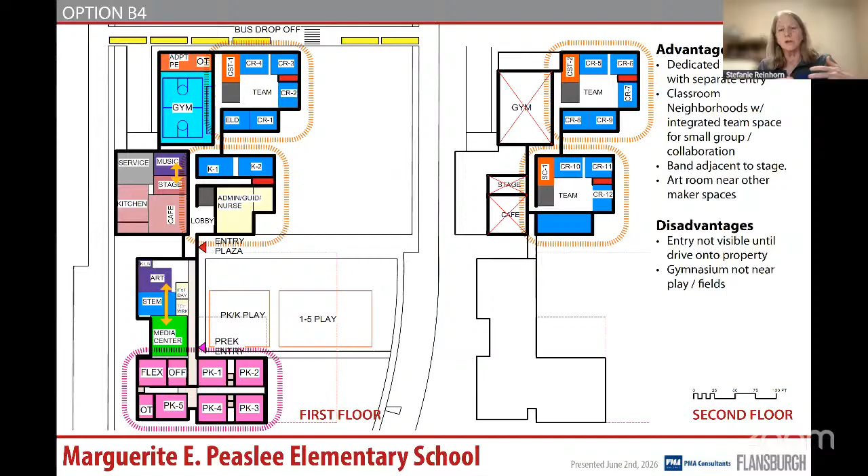With that said, I think these are things we would potentially be able to achieve with other configurations. I don't think it's exclusively possible with this configuration. It can be, for example, things like movable walls between classrooms creating different opportunities for grouping across classrooms, or having small spaces adjacent to certain classrooms without that team space. But that's kind of where it came from. I don't know, Greg, if you want to add anything to that.

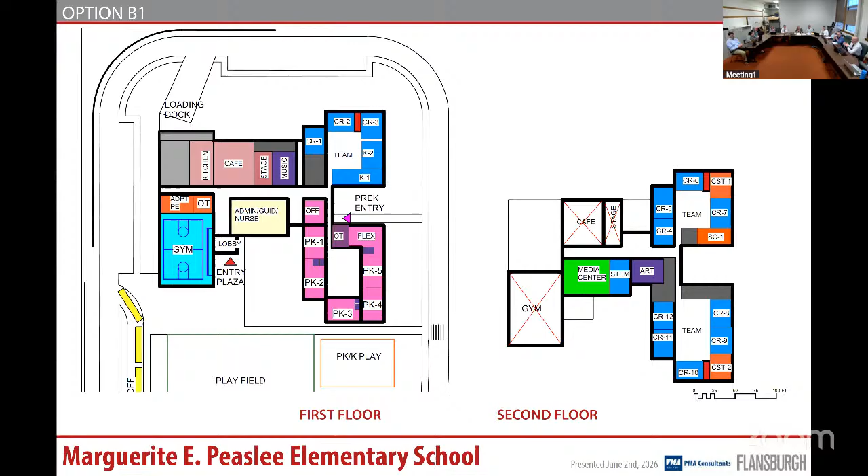Yes, so the only thing I would add, Stephanie, is that when you look at this C series, grades 3, 4, and 5, the idea was to have a pod of third grade classrooms together with neighborhood space where they could come out and conduct their learning outside of the classroom, gather outside of the classroom. So in the C series, the learning neighborhood was really important.

As we look at a smaller neighborhood school, obviously you have multi-age classrooms near each other. I think it would be nice to have, in terms of academic space, flexible space that classrooms could spill out into, but it's less important in a neighborhood school model where you have 2 or 3 sections of a grade level. Thank you. Any other questions regarding this design update?

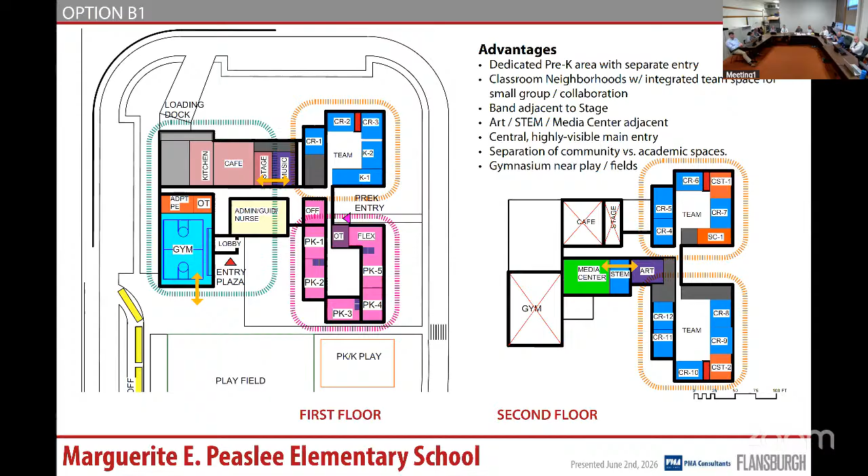Could you go to B2? I just had a question on, so one of the things we talked about before was what happens to that space between the addition and the existing building, and it looks like you've created some space between the two. Is that a hallway? Is that a courtyard?

That was my concern, because you'd have a big interior block. And I think that addresses that concern. You preserve those views and create views for the classrooms on the opposite side. And frankly, it's easier to construct because you have a buffer space.

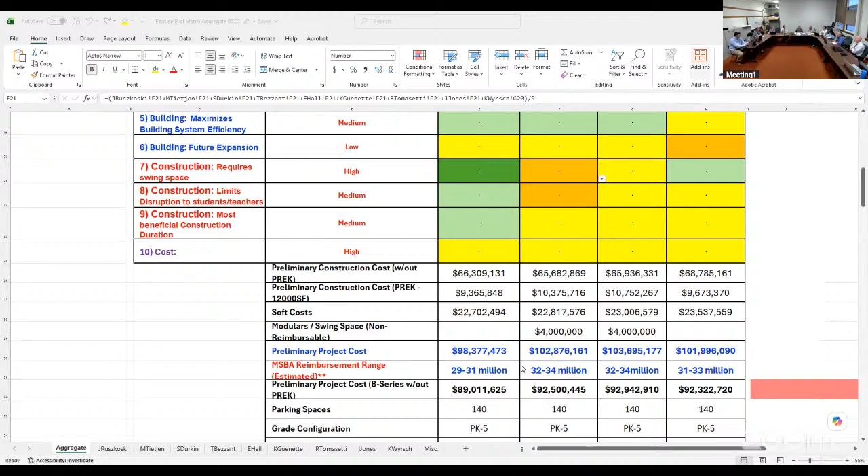And then I think when you step back and look at what the different options can achieve, there's value to what a B1 can do versus a B2 compared to a B3 and 4. When you look at B4 with the addition in the back, it does stress your athletic field and play fields. I think everybody can look at B3 and say this addition out back is stressing how we displace play areas and play fields. So that's pretty apparent. I think B4 does that maybe even a little bit more, to be honest with you.

So I think it's good if you could, are you able to log back into the site plans? Yeah. But I would say looking at the overall option, B4 gives you a little bit more flexibility in designing those academic neighborhoods, et cetera, because you have a bigger addition. But it does stress what you can do with your play fields and play areas.

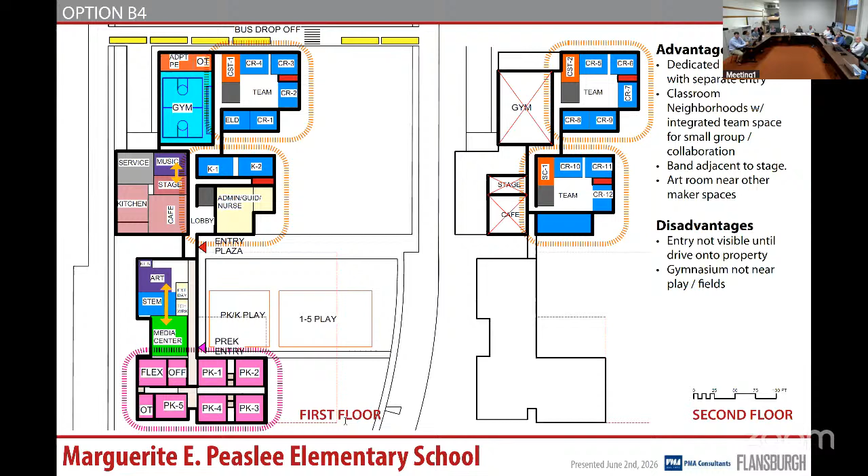Honestly, to me the B4 looked more chopped up than some of the other options. I have a hard time envisioning how that approach into the building is gonna look with just a teeny tiny chunk of the old building and then new building behind it. It's a lot of square footage.

I think the beauty about B4 was you're over your existing square footage, the 45,000, so you can swing all the kids into it. Logistically, it's actually a really smart option if you don't want modulars, but it does push your play areas to the south.

And I would say of any of those options, it's at least equal with B1, if not more, on site impact, because there's a lot—you're maintaining the existing building, plus you're putting a big addition and you're putting parking in the back. It's a lot from that standpoint.

As Jennifer pointed out, it's gonna be difficult, say with the gymnasium—you want gymnasiums to have community access. Sure, you've got a big parking lot there, but day-to-day it's hard for students to go back and forth to the play areas.

So I would say B4, looking at this, we can reconfigure the wings—the wings can rotate, the wings can do whatever—but at the end of the day, the play areas are still going to be justified to the south. B4 is a great option for being resourceful by retaining some of your existing options, but it's probably restrictive.

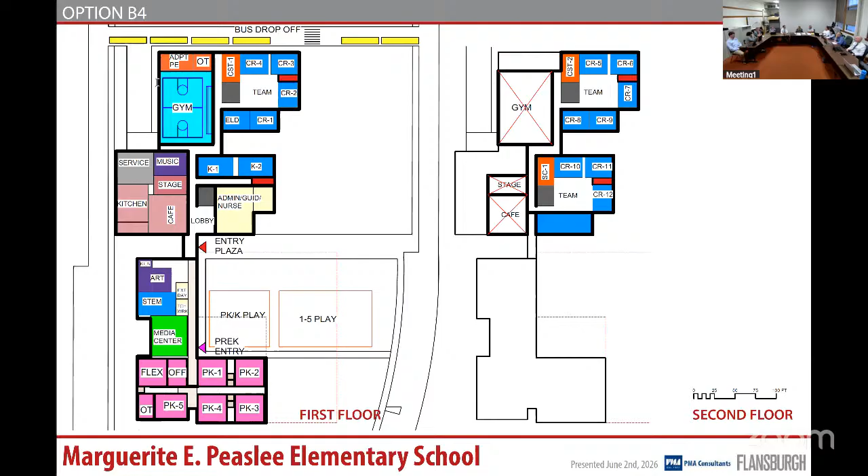And then I think on B3... Can you compare B3 and B2? Yeah, that's fine. I think the site plan's kind of the best there.

So losing the baseball is gonna be a hit to the programs. We still have a baseball and a soccer area to the right though. Could we enhance those? In effect, you could, but right now we're staying in kind, because those estimates don't look at improving anything on that. But if you go to B2...

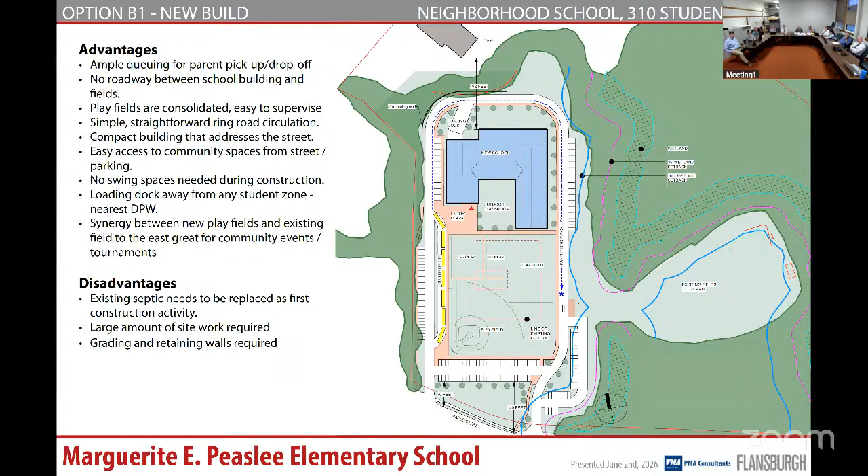Can you address where would modulars be located on this site, like B2, B3, where would you put them? So on B2, we would locate the modulars on the north side, in the playing fields. You're going to have the geothermal installed, then a section of modulars, kind of as an early site enabling item. We get the loop road at least established, but you're going to have the geothermal system being installed, and you're going to have modulars to the north, because that's the only area where you can get the 10 classrooms plus.

How many modulars are there? We're looking at 10 right now, but that's something we need to evaluate, because right now you have approximately 12 general classrooms within the main building with the K.

We're just looking at a general approach to the toilets and a little bit of supervision with admin.

And B3? In B3, it can be a little different. We can put the modulars to the north, justified to the right side of the addition, or to the south, but we'd probably propose keeping it in that area so your day-to-day logistics isn't interrupted. If we put the modulars in front of the building, that would disrupt your current parent pickup and drop off. So even on B3, we'd probably put the modulars perpendicular, justified to the right-hand side of the addition, which would preserve your current pickup and drop off. There's a lot of logistics when you get into swing space, and it's temporary, but it's something to be considered.

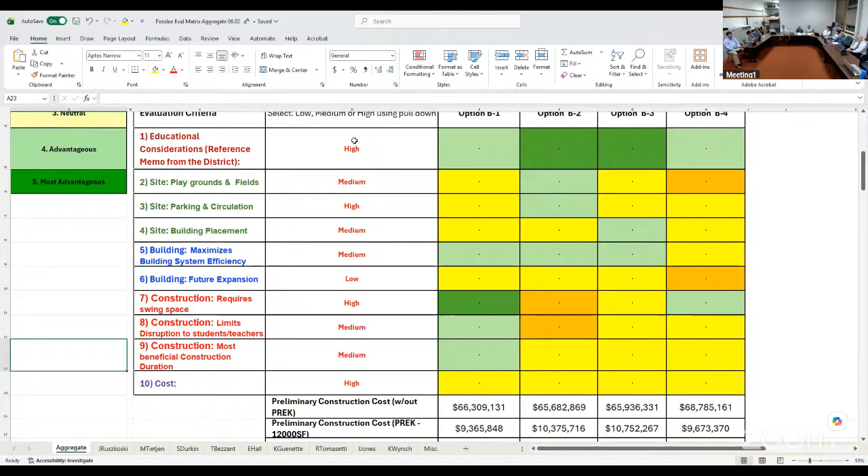But does anyone feel strongly about preserving B4? And if I did a show of hands, does everyone feel like we could eliminate B4? Speak up if you want to keep it.

Okay, so if we eliminate B4, it leaves us with a new build and two add-reno options. And those ranked identically on our heat map. They both had their advantages and disadvantages, as you can see.

For building placement, people thought B3 was more advantageous than B2, but then for parking and circulation, it's the opposite. They both ranked the highest on the educational scale, which everyone had as a high priority. So scoring-wise, they tie if you're looking at it as just a pure score, but both of them had their advantages and disadvantages, as you can see on the heat map.

I think it would be interesting to hear from, if anybody's willing to speak up, who is undecided, what data they would need to receive to become decided. If anyone's willing to speak to that, who's still kind of making up their mind between the new build and the add-reno.

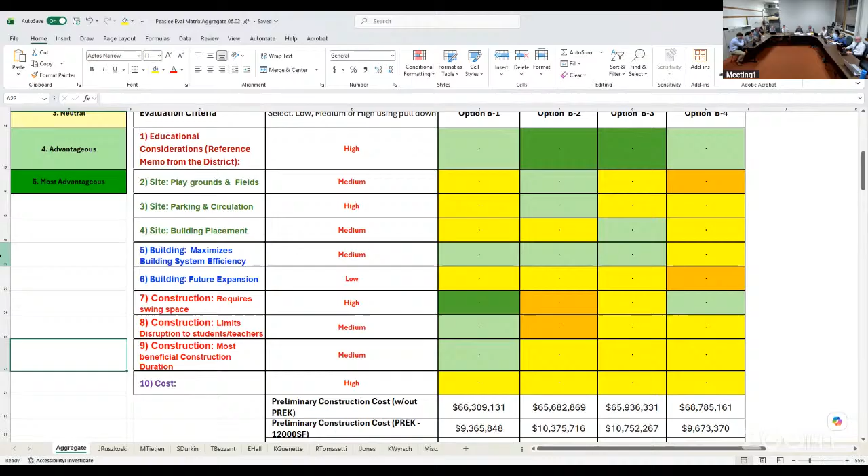That's a floor plan schematic difference between B3 options. So you can modify whether the addition is in the front or the back, that's the biggest thing for voting. I agree, I really do like having the DPW entrance and exit, so all of them may have to use that access.

You can still use DPW as a staging area, with a gravel access road. But the issue is, as we brought up earlier, on B2 the addition is right in front of the existing school.

So you're going to have access off Maple Street. Maybe there's a way we come down out of DPW and loop around, but really that whole area where you see the addition and the parking — from a contractor's perspective, if I was bidding it, I would want all that access.

I'd just answer your point directly, Jake. To me, life has a certain amount of inconvenience, and I can live with disruption if the end game is a much better product for the community. We all have inconvenience, I don't take it personally. Traffic sucks no matter where we are.

So I wonder with this option if traffic would actually improve, because if you think about the current site of Peaslee and the land space in the front, where cars queue up along that horseshoe, I'd want to know how many cars queue up on the current horseshoe compared to what was proposed.

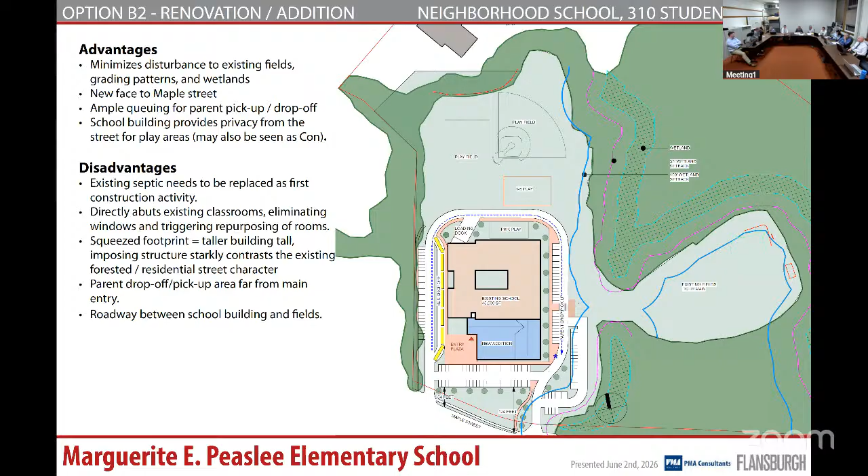I think for our purpose, we're really looking at B2 and B3, an addition to the front, an addition to the back. They're identical square footage, and I tried to make the floor plan identical just to make it easy - just for B2 and...

Rick, could you tell me, are the start times for pre-K and K through 5 the same, or could they be staggered? That would help alleviate the...

No, for me, it was, in addition to the large gym in the front of the building too, which is something that's not - how are we gonna make that look attractive? Because the gym generally does not have any windows. Except, yeah, it's gonna be a taller massing. How is that gonna play with getting the proper amount of daylight in that 25-foot court? Is that south facing, right? That's south facing, so basically that's gonna be blocked because you're not gonna get a ton of daylight in that 25-foot gap between the existing building and the new addition, right?

It's gonna be a shadow from the... I think on B3 programmatically it works better because the gym has access to the fields and then the pre-K is off to its own. That's when I saw this too, it's kind of what I was expecting.

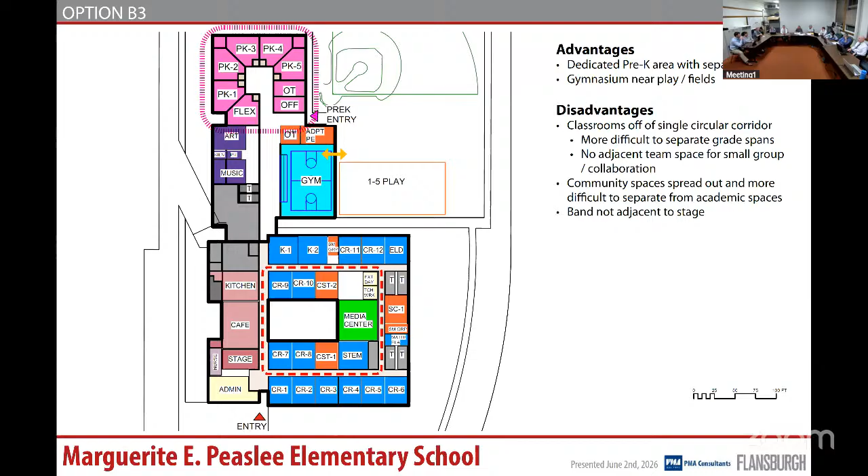This is your Lincoln kind of idea. It's a pre-K with your admin that's controlled for the main building down to the south, and then whether the pre-K entrance is there or somewhere else, you're able to control that, and your athletic facility has access to play areas. Can you go back one more time, or back to the other schematic?

I'm sorry, I'm making you do this. Well, I guess in this one too, I was just thinking of isolating access for weekend activities and things - they both work for that. Where you can close off portions of the school and people can still get in the gym. Because right now, when you go to Peaslee, we have Thursday basketball practice - it's a free for all. It's hard to get in the building, but there's nothing closing off the gym. So either one of these works.

I think the benefit here is you're able to hold the loop road tighter and get your play areas as the buffer between the site and the DPW, similar to what you have now. But you do have a lot of program front loaded with a lot of different access points. Off of maybe... Mike, thanks.

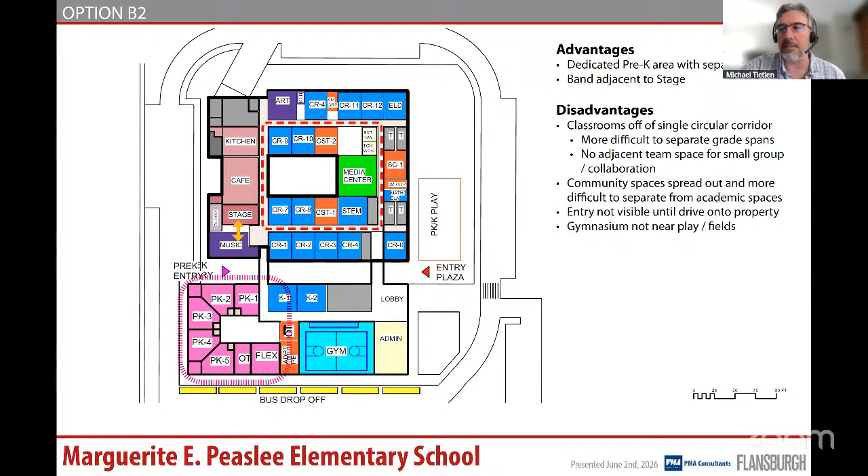If we had to get down to one, I would be for B3. Just looking at the layout, you've got all your construction mostly in the back, not up front with Maple. That additional drive space, even though that may be more expensive, looks like you could probably - if we can get an exact number - you're queuing cars up for pickup and separating them from the buses, right?

The tighter that drive is, the more you may have an overlap between vehicles and buses trying to get out. You may be able to queue them all without them blocking, so those buses can make the turns they need to make to get out.

The drive isn't separating the fields from the schools, right? So kids don't, even though there shouldn't be many cars going through during the day, have to cross a street or a drive to get to the outdoor play fields.

Also on 3, your gym is by your outdoor play fields, right? If your gym is all the way up front and your play fields are all in the back, they've got to walk either outside or through the school to go back and forth or do an activity outside or inside.

And then again, on 2, I like the idea that they'd be creating that space so you'd have natural light for those classrooms in the front, but it's still sort of space to nowhere, right? It's just going to be a small courtyard area. You won't have direct light getting in, nor maybe a breeze that would be able to come through the window. You're kind of blocking that. And again, it's just kind of empty space where you couldn't sort of get out that way if you had to, from those classrooms.